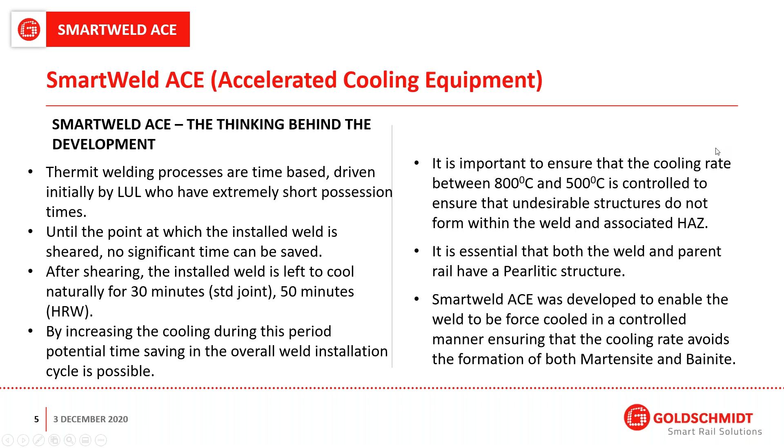And it's very important to realize that the amount of mist or water you're delivering is crucial to that cooling rate. And it was also important, through various restraints these days in health and safety, that the equipment was light, but it was also robust, and it's battery powered, so there's no need for mains power, and it can be charged up while back at the depot, during the day or during the night, whichever shift you're not working on.

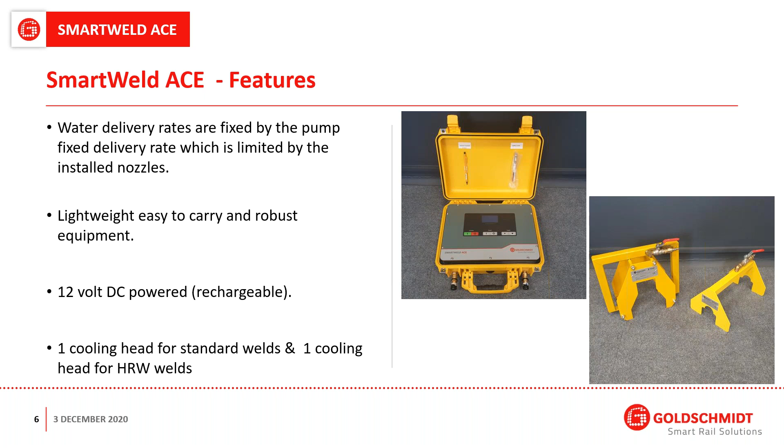And there's two cooling heads, so there's one for a standard weld and one for a head repair weld. So just to go through the broad process, this is after we've sheared the weld, and this is on a standard weld. So once sheared, the top of the mold is removed, as you would normally expect, with the head and the risers removed, and you remove all the associated mold material.

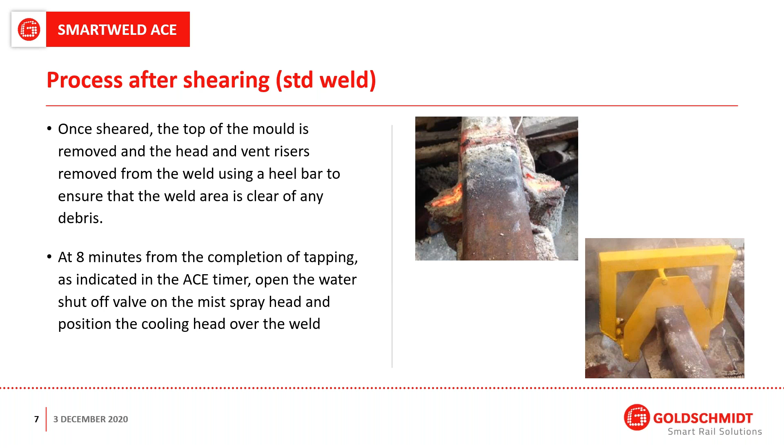And as I say, it is an extremely fine mist. We are by no means whatsoever, to use a pun, pouring water over the weld. We are spraying an extremely fine mist. So after the application of the spray for a period of 8 minutes, again, this is all timed, computer controlled by the control box I showed you earlier.

After 16 minutes at this point, the cooling head can be removed. So at that point, you can then start taking off all your alignment wedges, all the fixings can be replaced, and you can actually start grinding. So the weld now should be below 400 degrees, and you can check this. We supply a Tempilstik, and you can check the temperature all over that weld.

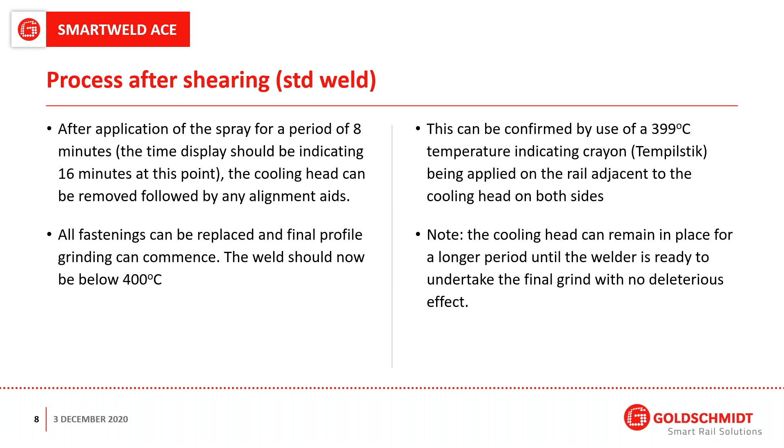Note that you can keep the cooling head on for longer than that if you wish, but 16 minutes is the time we recommend. So we're just getting through a few benefits, just sort of cutting down a few benefits that can be used. So when installing a standard Thermit weld or HRW, the main benefit here is it reduces time between the weld and then grinding.

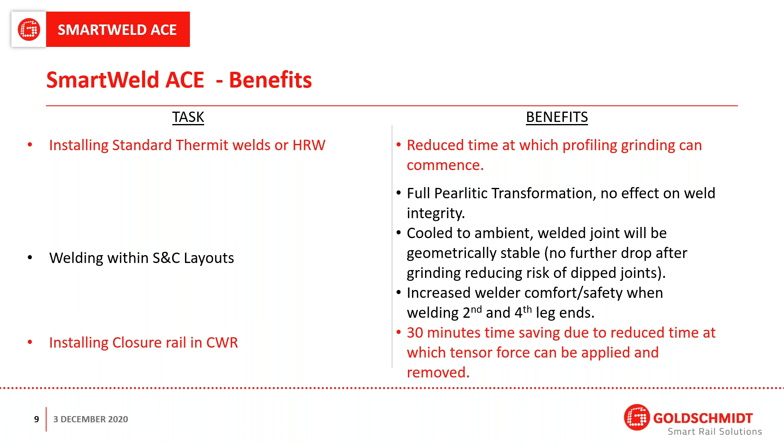So installing a standard weld, we get circa 15 minutes saved at the point where the final weld can be ground. If the unit is applied for 20 minutes, the weld will be geometrically stable and can be inspected on completion of the grind. And an important point, we use approximately 2 litres of water per weld.

And a welding team will always carry water with them. There's no extra weight or any extra kind of materials or equipment required, and all the equipment required to carry the water we provide within the equipment that we supply.

With an HRW weld, which we believe there's going to be far more requirement for from Network Rail and London Underground, you get a 30-minute saving on installation time, which commences, as previously stated, after shearing, which is 18 minutes. So there's a huge saving to be made on HWR welds and time.

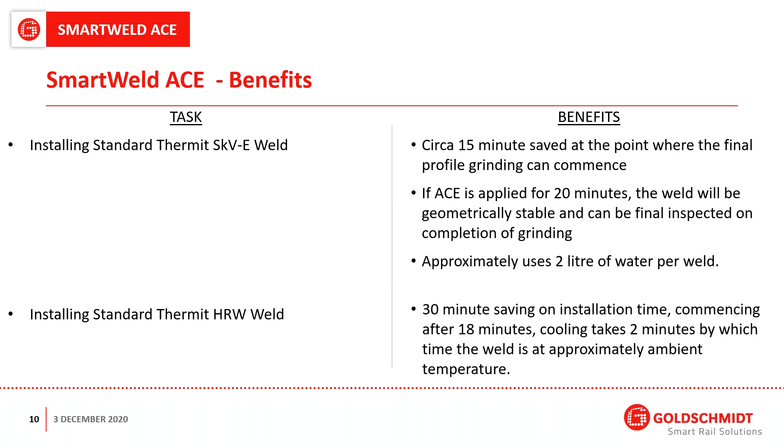S&C installation. We're thinking about here because when you're doing 4 welds between the joints on the end of each leg, the welders are not having to work over very hot welds. It's safer and far more comfortable for the welder to be moving between those welds. Obviously with the 20-minute saving, again, we're talking about quite a significant amount of time. But with S&C here, we're talking about safety because you're very often welding 4 welds in quite close proximity to one another.